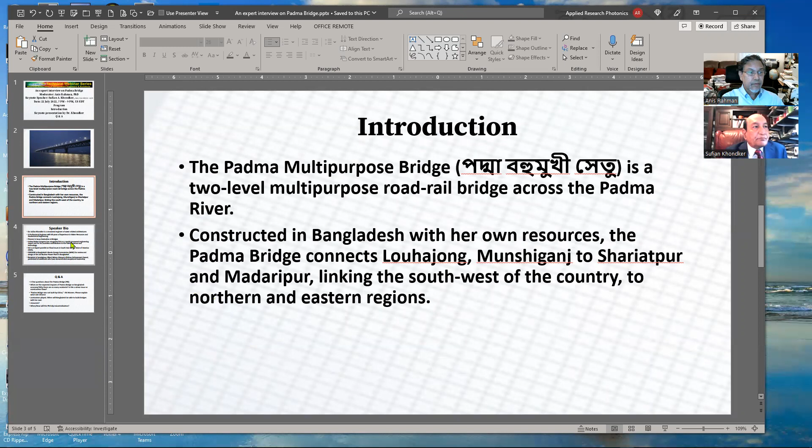Today to have an expert exchange on Padma Bridge. Our keynote speaker today is Dr. Sufian Khondker, PhD, PE, DWRE, and ASCE. He will present a talk on the Padma Bridge that has recently been completed and opened in Bangladesh. The Padma Multipurpose Bridge, or in Bangla Padma Bahumukhi Setu, is a two-level road rail bridge across the river Padma in Bangladesh. Constructed in Bangladesh with her own resources, the Padma Bridge connects Louhajong, Munshiganj to Shariatpur and Madaripur, linking the southwest of the country to northern and eastern regions. So this is a miraculous, marvelous achievement for Bangladesh, and that is the topic of today's expert discussion by Dr. Khondker.

Dr. Sufian Khondker is a renowned engineer of water-related architectures. He is well known all over the world for his expertise. He is a professional engineer with 50 years of experience in water resources and geotechnical engineering. He is a pioneer in Scour evaluation at bridges. The United States Congress has recognized him as a world-renowned engineering expert and for his countless contributions to the field of science and technology. He is an expert panelist on flood issues in South Asia for the Voice of America. He is also an advisor to Bangladesh Atomic Energy Commission for reviewing and designing of the first nuclear power plant in Bangladesh. He is recipient of countless awards, including prestigious Albert Nelson Marquis Lifetime Achievement Award, which is presented to individuals who have demonstrated exceptional leadership. So, without further ado, it is my extreme pleasure to invite Dr. Khondker to present on this Padma Bridge.

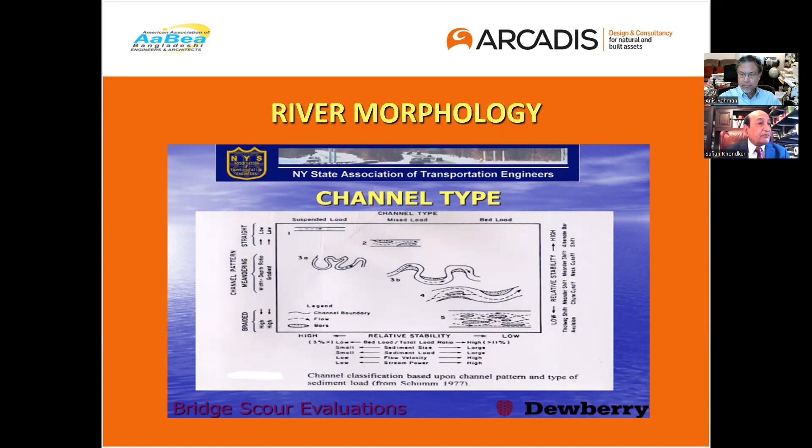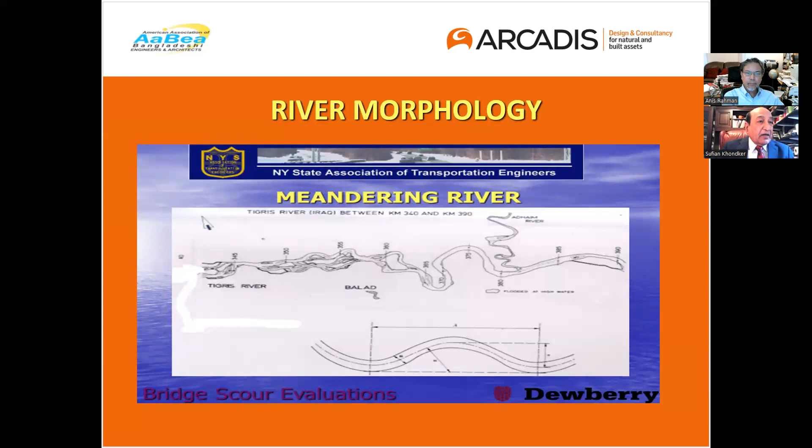On the other hand, the inner bend is always going to cause deposition. This is a well-known fact. Also, the meander moves downstream at a rate which varies. Once we know that, for the river engineer, it is much easier to control a meandering river, knowing those phenomena well.

Next, let's look into the braided river. A braided river, in a single word, is a nightmare for river engineers. It doesn't follow any natural laws. Sometimes it has a bend, sometimes it is straight. It has multi-channels, as you can see. One day it is flowing on the right bank, the next day it will be on the left bank. In other words, it cannot be predicted. It does not follow any laws of nature.

In addition, the braided river carries the largest volume of sediment and flow. So, as I said, this is a nightmare for river engineers. Unfortunately, the Padma Bridge, where it is located over the River Padma, is in the braided portion of the river.

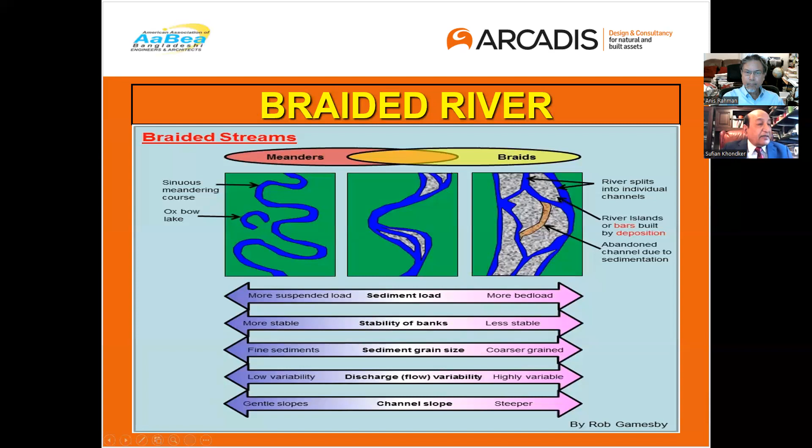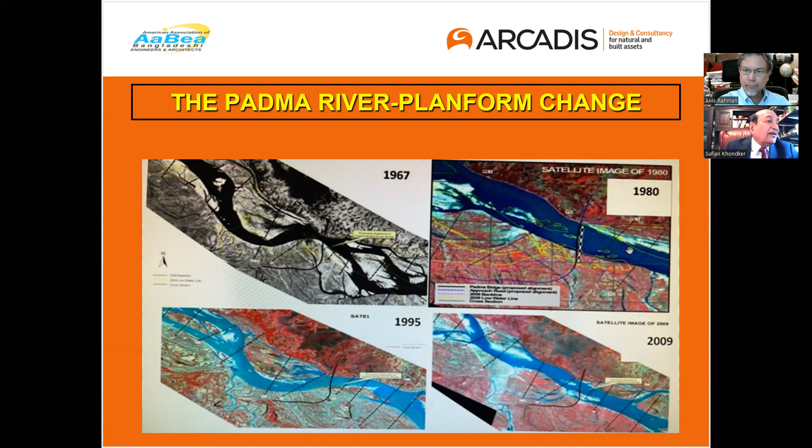You cannot predict how to keep this river within confines. Otherwise you will have a bridge here and the river moving away from the bridge, leaving it empty. That was a major concern. The feasibility study was done by JICA, and they decided to build a bridge at that location. Of course, to confine the river, you will have to protect it. Otherwise, the river is going to wander around and we may end up with a bridge which has got no water underneath it. Those are the major concerns as far as the river is concerned.

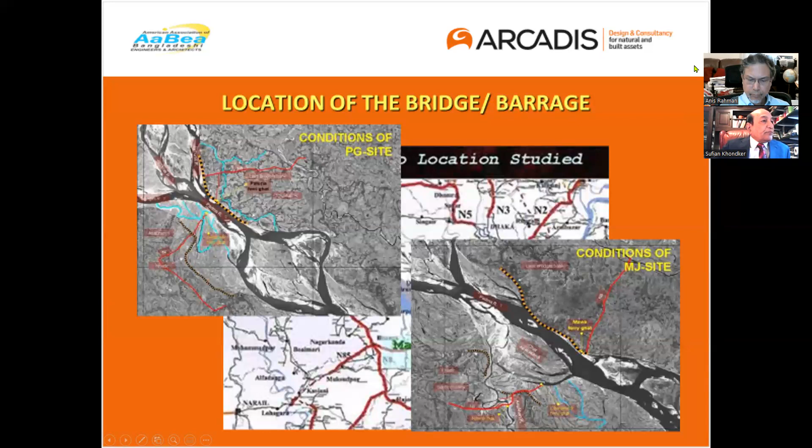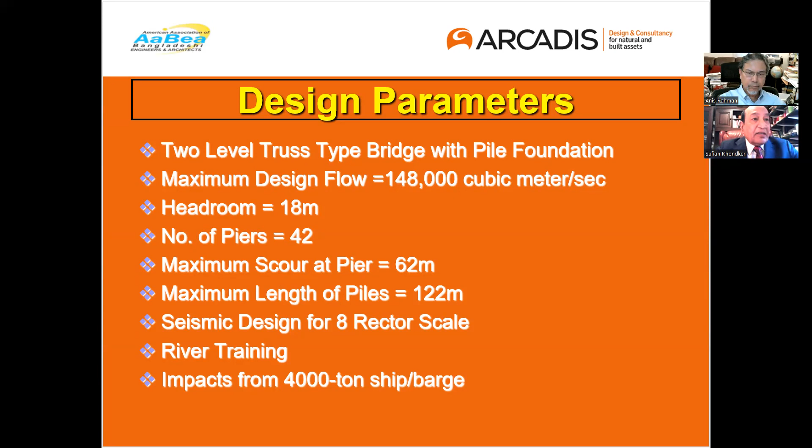Another major design criteria is the river training. As I mentioned, Braided River is very difficult to train. It keeps on changing course, and it is very difficult to contain the river within the confines of the bank. And since there are many navigational requirements also, the bridge was also designed for the impact from a 4,000-ton ship or barge. If it hits the pier, nothing will happen. So these are the criteria, extremely stringent, very difficult.

In terms of configuration of this bridge, this is a truss and prestressed design. The top part has 2 lanes and 2 lanes, 4 lanes with a divider. This is a precast post-tension concrete piece, and then this is the steel truss supported.

And this is a 2-level bridge, as we mentioned. On the lower level, there is a single track for the railroad, and that is compatible with both meter gauge as well as broad gauge. So this is the superstructure of the bridge.

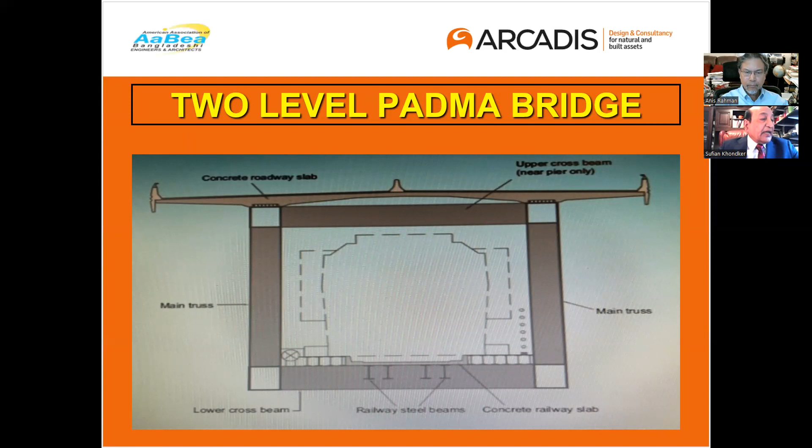Now, what is the weight of that thing? This is unheard of. The total weight per pier will carry is about 10,000 tons. So as you can see, this pile has to carry individually roughly 1,600 to 1,700 tons per pile. Never ever heard of. Most bridges design piles for maybe 50 ton, 100 ton, 200 ton, maximum 300, but 1,600 ton per pile load is the first time in the world.

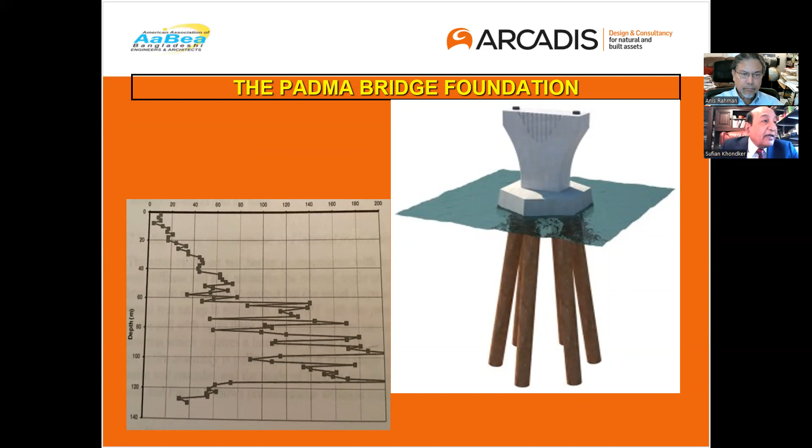So the way it was designed, the end of the pile will be in this layer. Just above that, unfortunately, the soil characteristic is so poor. This is a clay layer, stiff clay. As you can see, its capacity dropped so much, from almost 200 blows per 300 millimeters to again back to about 20 to 30. So obviously the goal is to put this pile above this layer, mostly within this layer. And that's the way originally the foundation was designed.

This is the detail of the pile foundation. As you can see, there are 6 piles, all battered. Why is it battered or inclined? Because only then can it take the horizontal load. Vertical piles cannot take the horizontal load. Inclined piles can take the horizontal load generated by a seismic event. So that was required, as you can see, the pile caps and everything.

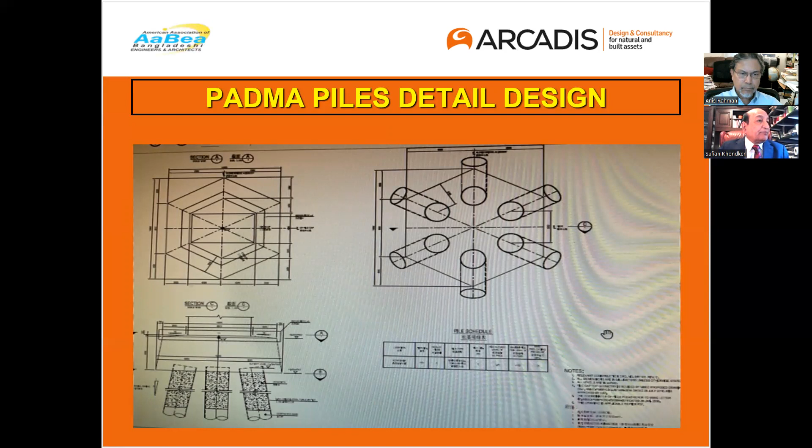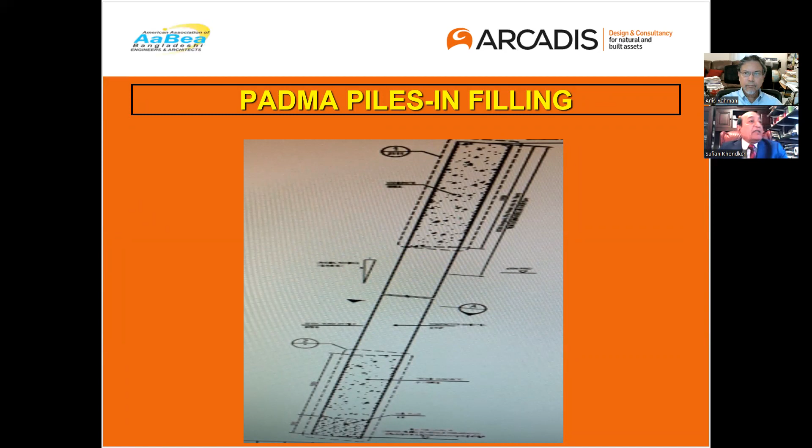The problem showed up because the generic characteristic of the soil I showed doesn't apply everywhere. When they started building these 42 piers with piles, they had to take soil boring for each one, and found that 22 out of 42 did not have the required soil strength to carry 10,000 tons. That was a real nightmare. Those piers are primarily located on the Mawa side. That was the biggest shocker - how to improve the capacity of the piles.

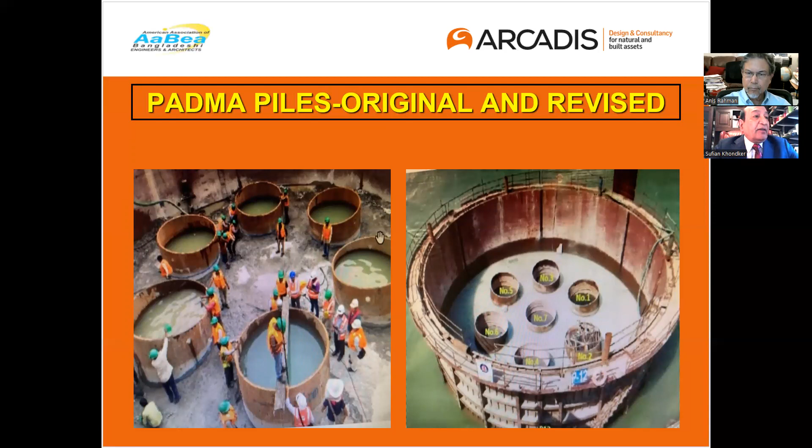Still, we had to come up with a unique solution to improve that friction, since as I said, the piles are carried by friction. How the friction can be increased is what people were looking at. In Australia, on two bridges, they used what is called the skin grouting method to improve the surrounding soil so it offers larger friction and the piles can carry more load.

But in Padma Bridge, we already had the piles fabricated - this pile was already made - so we had no way of doing this the normal way. The innovative idea was to weld a channel on the outside of the piles, with perforation in that channel or plate. Then you pump grout, a mixture of sand and cement, which goes out through the piles under pressure and creates a circular zone where the soil around it is improved and able to take additional loading. Again, only in Australia have two bridges adopted this method - it's a very rare situation.

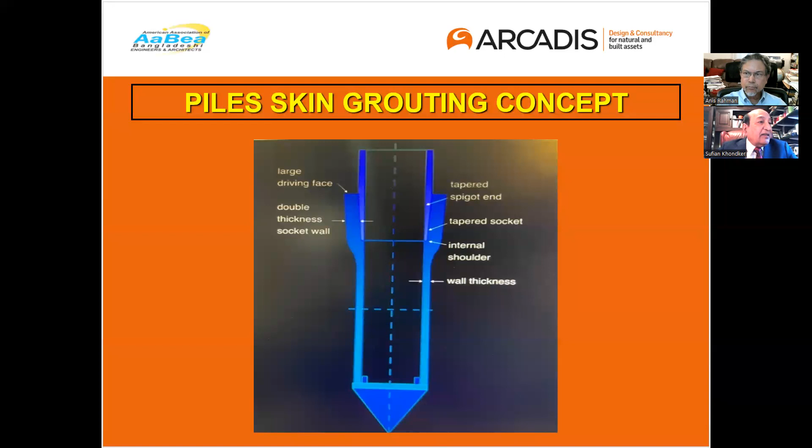But another problem was how to drive this size of pile - a standard hammer cannot do that. When constructing the Jamuna Bridge, the pile diameter was smaller and the depth was only 80 meters maximum. Here, the diameter is 3 meters and the depth is 122 meters. The two hammers used in Jamuna Bridge could only drive this pile up to maybe 60 or 70 meters, but no further. So a special hammer was designed and fabricated in Germany just for this project and brought in. That hammer was used to drive the pile for the additional length. Nowhere else in the world is there this kind of hammer - this was the first time it was used in Bangladesh, for the Padma Bridge.

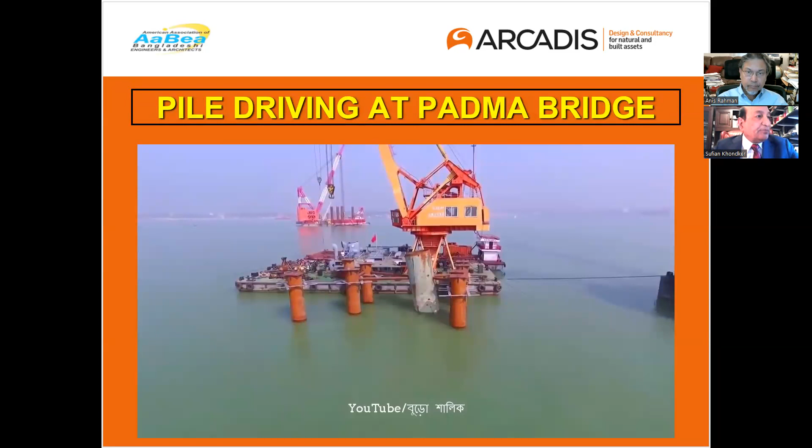Another concern I mentioned before is the scour at the pier. This is one of the most difficult rivers. At peak flow, the velocity has been measured at almost 4 meters per second. It's unthinkable—the Amazon probably has a higher velocity, but nothing has been built there. But this is the river, and the velocity could be so high that scour could be tremendous.

For the scour computation, the Bangladesh government hired a very special company called Northwest Hydraulics, Canada-based, with an office in America too. I worked with them very closely—they've done scour evaluations and model studies for me in at least 4 or 5 of my projects. I know the principals well; we are very close. Dick Galley was the principal, and on my invitation he came to Columbia University for an international conference on Padma Bridge. So I knew we were in good hands. When the computation and model study came in showing the scour could be as high as 62 meters, that was shocking. These piers had to be designed for a potential 62 meters of scour.

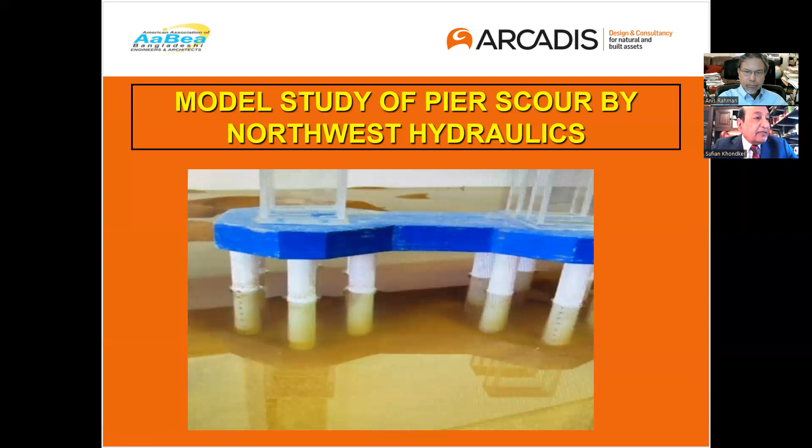Now, what is scour? As I said, I have quite a bit of experience in scour evaluation. I give lectures for bridge and highway engineers in the United States, training them. This was not a very well-organized effort even in the United States prior to the 1980s.

Even in the United States, there was no clear-cut methodology or organized program to evaluate scour—how it happens, what can be done, what the countermeasures are. But in the 1980s, three major bridges failed within a span of two to three months. The most renowned was the Schoharie Creek Bridge in upstate New York, where 10 people were killed. Then the government and federal administration started to scream that something had to be done.

So a crash program was launched to come up with a way to evaluate scour. The American Society of Civil Engineers formed a task committee under the leadership of Professor E.V. Richardson of Colorado. I was a member of that task committee, and I personally knew E.V. Richardson well. We worked together with many other members and came up with a document known as Hydraulic Engineering Circular, HEC-18, for evaluating scour at bridges. That is now used in the United States and Canada as the Bible—every engineer follows it. We also evaluated almost 500,000 bridges in the United States. Most of them are low risk, but 5% are scour-critical and can fail. So we launched a crash program to provide countermeasures, bringing future failure risk of existing bridges to an absolute minimum.

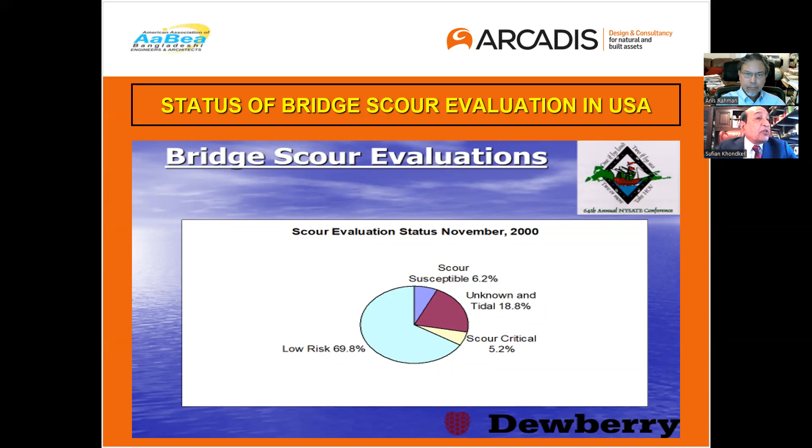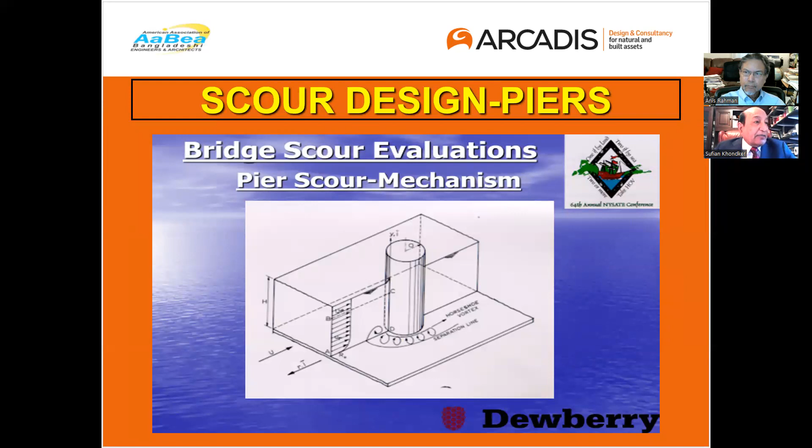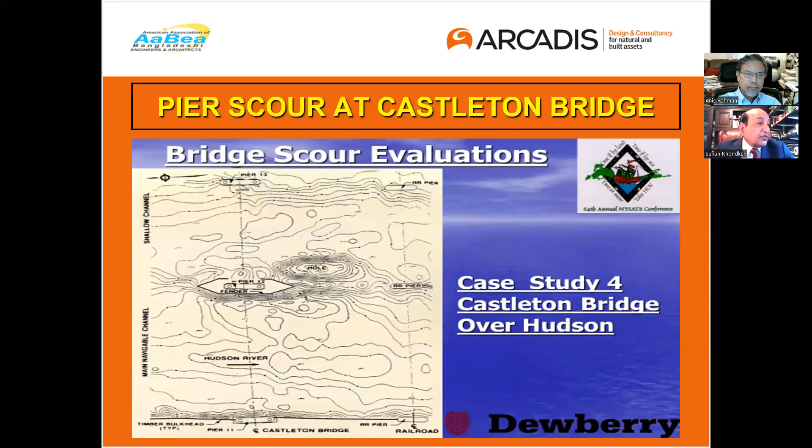Next, please—I'll show one example. This is a large bridge in the New York thruway system, the Castleton Bridge over the Hudson River. As you can see, this is the pier, and there is scour here. There's also a big scour on the downstream side, which is a mystery—but I have some answer to that, that's another story. As you can see, the scour hole was substantial. We looked into it closely and found the reason for this scour was a little different: it was the rejoining of the separated flow that caused it.

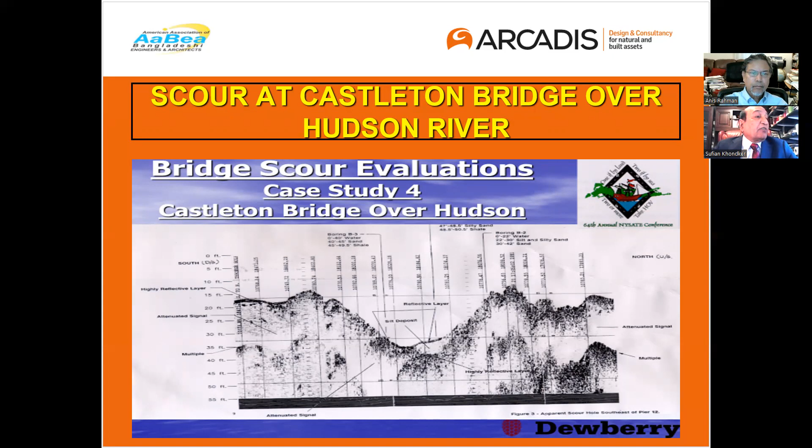Now, this is how we compute the scour. The scour has two components: one is the natural component, shown here in yellow.

That will happen in all rivers, whether you build a structure or not. We call that contraction scour. When the river width reduces, the flow increases, and this yellow portion will always happen, irrespective of any obstruction.

When you build any structure, for example a pier or abutment, you impede the flow pattern of the river, intercept the streamline, and that creates vortexes and turbulence, causing additional scour, what we call local scour. As shown at the pier, this red part is the local scour. Combine these two and that is the total scour, so any structure has to be built below that level.

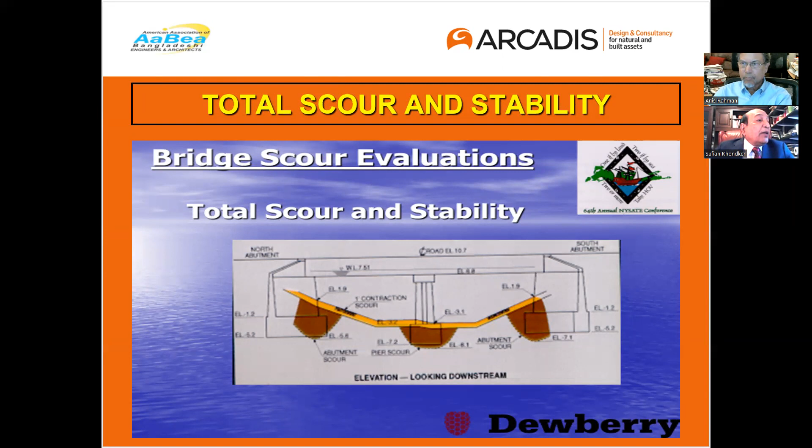Now, this 62 meters of pile length does not contribute. If this scour happens, this 62 meters of pile will not help carry any load, because there is no friction, it's water. So only the bottom 60 meters is carrying that load of 10,000 tons. That's the reason we needed such a long pile at Padma as opposed to other bridges.

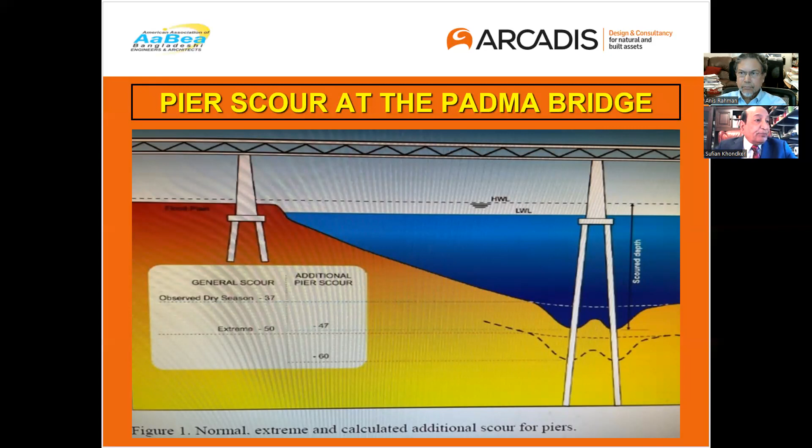One question comes to my mind all the time: instead of allowing for the 62 meters of scour and designing the foundation for the remaining, why are we not looking into protecting the pier against the scour? That way, we don't have to consider the top 62 meters as sacrificial. If we can protect against the scour, then those portions of the pile will also carry additional load.

Also in Bangladesh, we have improved this concept of riprap. We have introduced a very innovative scour protection design called articulated concrete blocks, individual blocks laced together by polyethylene. This acts as one flexible unit and can protect against scour. This is what we introduced at the Rooppur power plant.

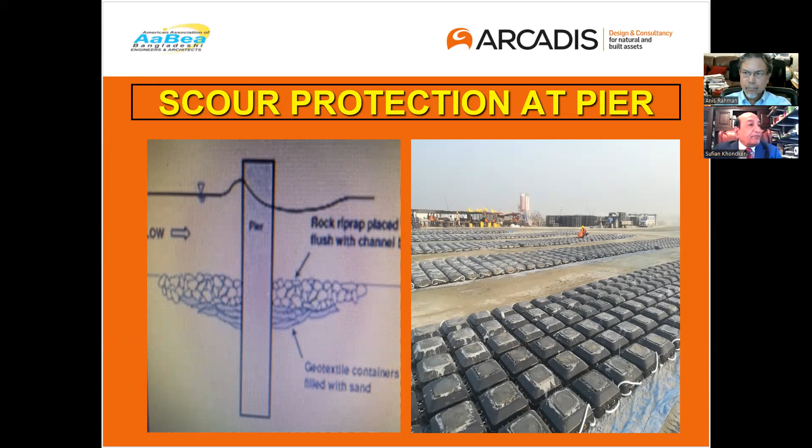One of the answers I got from one of our BUET friends was that they did not consider scour protection because the concern was that, if it protrudes above the bed, it might impede fish migration. Obviously we don't want that. The Ilish fish, mispronounced in English as hilsa, of the Padma River is well known, and it's the favorite of all Bangladeshis, all Bengalis.

Of course we don't want to impede the migration of the Ilish fish, and there is a big opening between the piers. I'm convinced that that will not happen.

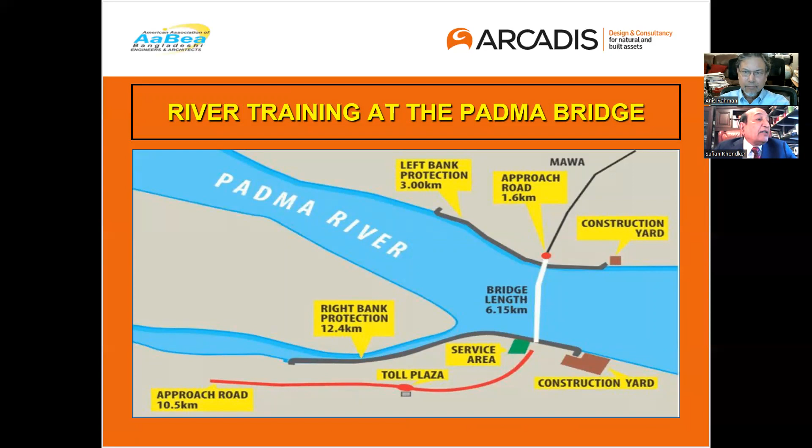Now the next major effort was how to keep this braided Padma River within the confine of the bridge. As you can see, on the left bank, defined by the flow direction, there is protection along the bank, and on the right bank a longer protection, so that the river is always funneled under the bridge. This was a major, one of the largest efforts to train the river within the confine of the bridge opening. How it was done, next please.

It was a massive effort. I was amazed the way it was done. First, the river was dredged about 28 meters to take out all the muck, the soft soil and the mud, everything was taken out.

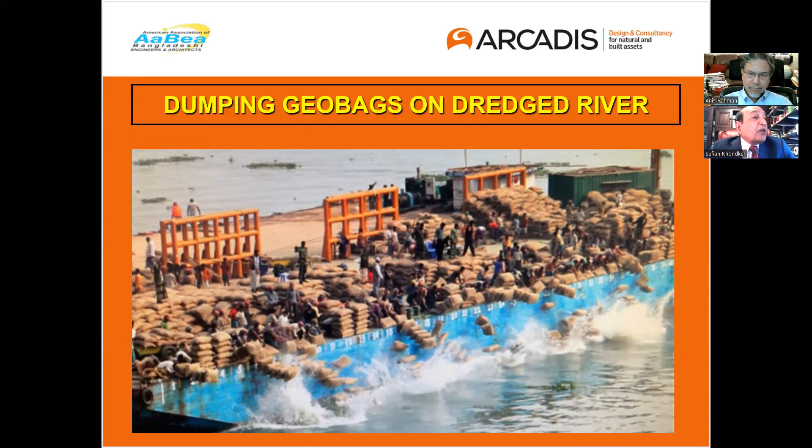They went up to 28 meters because that was the capacity of the two dredgers in Bangladesh. Once they removed all those things, they filled up that big hole with geo bags, which are geotextiles filled with sand, in 3 layers. Then on top of this, they started to put the armoring layer, or the top layer.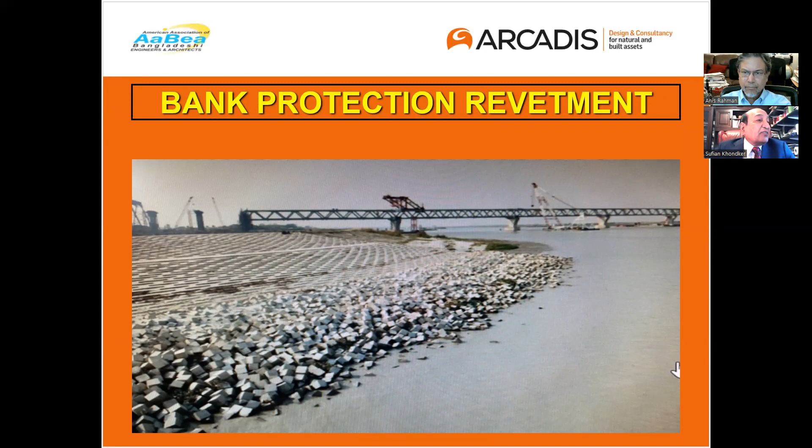Those are concrete blocks, each weighing about 165 kg. Because the velocity is so high, they had to be individually very big, and some pavement was done. This is a massive, massive effort. So the concept is already there. This concept at a lower scale could also be done at the piers to protect them.

As you can see, the finished product, this was done by a Chinese contractor, Sino Hydro. Until today, the total cost of this river training work is approximately $1 billion. Never ever in the history of bank protection has such an amount of money been spent.

But Padma is not a regular river, we have to remember that. This is a unique thing. The next important design parameter is the seismic design. How do we design this massive structure against a seismic event? As I said, it was designed for 8 on the Richter scale.

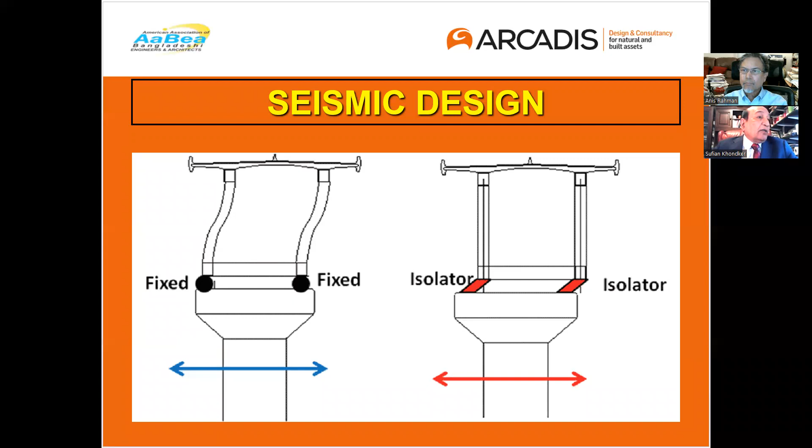This bearing was used for the Padma Bridge, 2 in each pier. And again, anything I'm talking about is a monstrous size. Each bearing has to carry a load of 5,000 tons. Nobody ever heard of such a thing. This is one of the largest bearing systems ever designed and built.

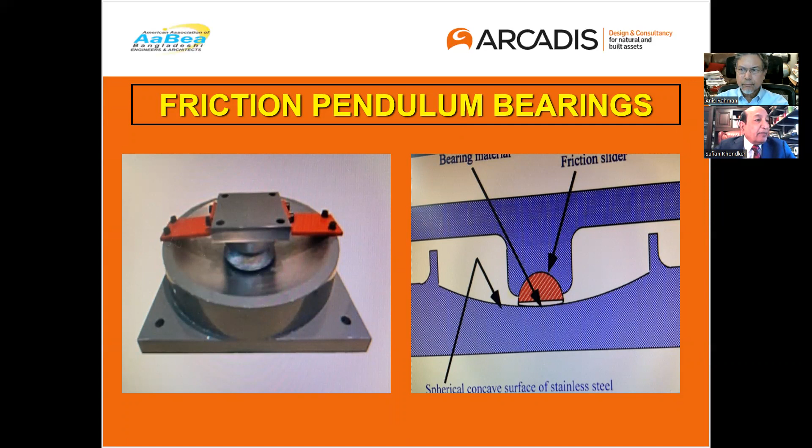It was built in Wuhan, China. But during the testing, I heard one of the bearings had a little problem. So they sent that particular bearing to a special lab in San Diego, United States, which has the facility to test this one, and it was tested there. So this is again a unique bearing, never done before, first in Bangladesh. This is the actual picture of that bearing when the cover was taken out.

So that was the criteria of the seismic design. The last criteria this bridge was designed for is that this river has ships, barges, and primarily ferries. Because of the very high current, or whatever the reason, they can ply loose and hit the pier. Each and every pier was designed to take an impact load from a 4,000-ton ship or barge. That hasn't happened in Padma yet, but it was designed for that.

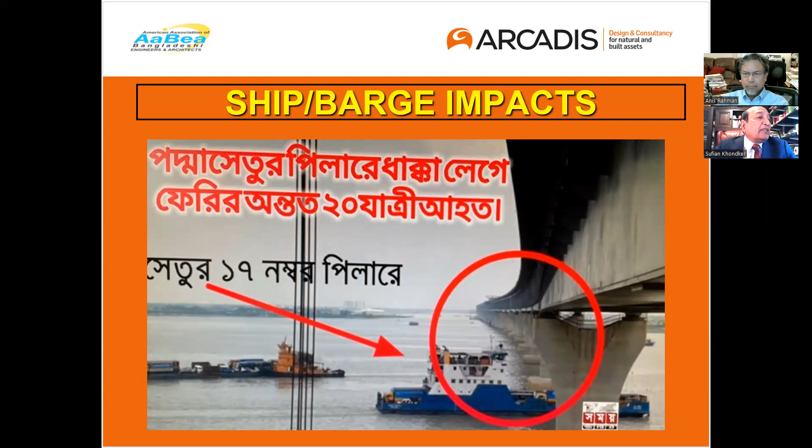Recently there was an event, one of the ferries hit pier number 17. Nothing happened to the bridge, but as a result of the impact, people on the ferry were injured. So these are the challenges that were addressed for the Padma Bridge. As I mentioned initially, my title for this topic was, this is the engineering miracle of this century.

So I will share one project, which is also considered the engineering miracle of the 20th century, and that is the Zuiderzee project in the Netherlands. When they were building it, I was studying in the Netherlands, and they took us 2 or 3 times to see how massive this structure is and how it is being built. It was a tremendous education for me. I have never seen such a big structure.

And again, we talk about the cost of Padma Bridge. When they started this Zuiderzee closure project, there was no precedent in the entire world. Nobody knew how much it could cost. So the Dutch government gave a blank check to the engineers: don't worry about the cost, go ahead and do it. This was a unique design. They don't say for sure, but the rumor is that the cost of this structure in 1970s dollars was between $16 to $20 billion.

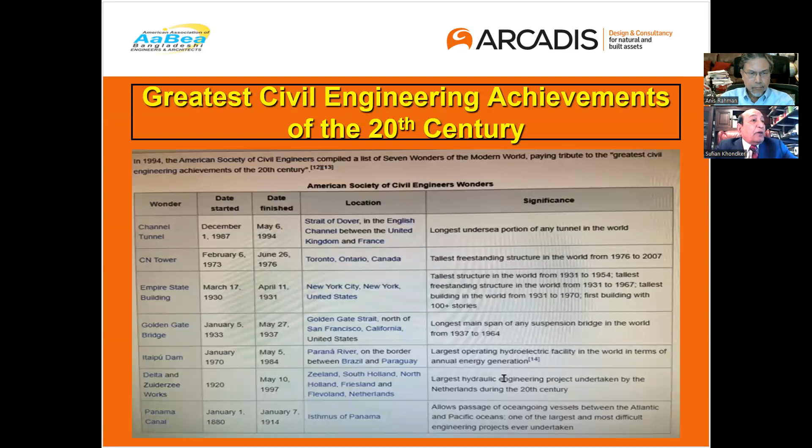Why? Because, number one, the bridge is over the most difficult river in the world, the Padma River. Nobody has ever built any bridge under these circumstances. The double-decker bridge, a 2-level bridge with a truss system, is also a unique and rare design. Most bridges are single level, but this is the uniqueness of this design. The pile foundation—I spent a lot of time explaining the pile foundation and the challenges offered by that—this was never done in the history of engineering before Padma Bridge.

The bridge has been designed for the most severe seismic condition, as I said. A bearing has the capacity to carry 5,000 tons—nobody ever thought of, or even heard of, that. Scour was another major concern. None of the structures ever built in the entire world has had to design for such scour, like 62 meters. And of course, I explained the unique bank protection concept, the river training concept, and the most expensive and most innovative design ever taken. Considering all this, I'm convinced that Padma Bridge can easily qualify.

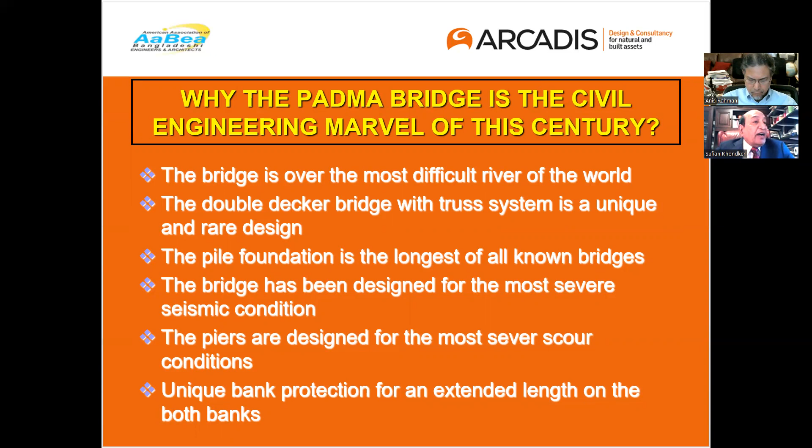This is my last slide. Padma Bridge is a modern engineering marvel. But again, we have to tell our story. Nobody gives you recognition unless you ask for it. So many of you probably know that we are convening an international conference in Dhaka, Bangladesh, and the lead organizer is the American Society of Civil Engineers. Their counterpart will be coming, and we'll be telling them about our great Padma Bridge, and we have to lobby actively to ASCE so that Padma Bridge is included in the list of modern civil engineering marvels for the 21st century. Thank you for your patience.

What a nice presentation, what a wonderful presentation. I wish we had many more marvels like that to talk about. Unfortunately, this is the only one we have in Bangladesh right now, and obviously the current government has a lot of credit to make it happen. Everybody knows the history they are going through and have gone through to achieve this distinction.